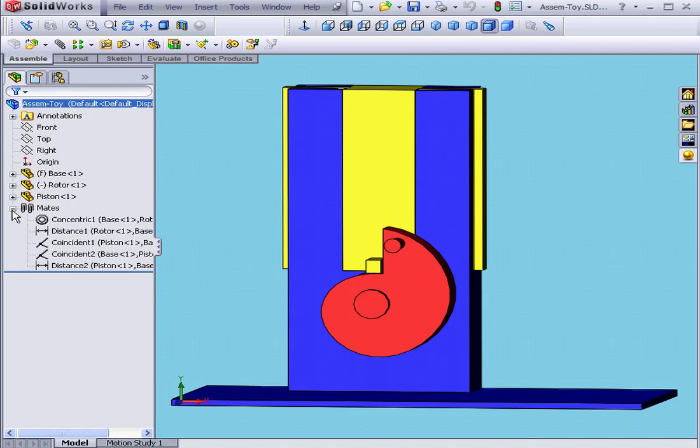Right here, as you currently see highlighted with these purple contours, are distance mates. They're currently set to 0 millimeters. Let's go to our Motion Study tab now.

First, let's be sure to disable Autokey. That's in case we need to move our model. We don't want the movement to be recorded. Now we'll position our time bar at the 1 second mark.

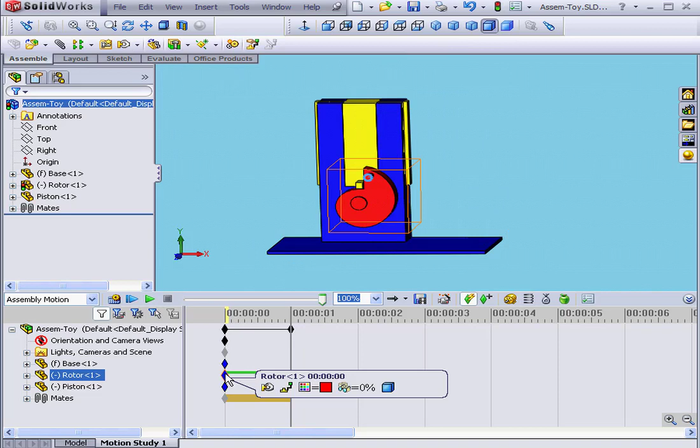Let's turn the rotor 90 degrees. A green change bar appears in our timeline. Callouts appear, naming the rotor at 0 seconds and again at 1 second. Let's move the time bar to the 2 second mark now.

I'm going to turn the rotor another 90 degrees to the approximately 180 degree position. Now we'll move the time bar to 3 seconds, turn the rotor again to roughly 270 degrees. The last movement of the rotor takes us back to the original position.

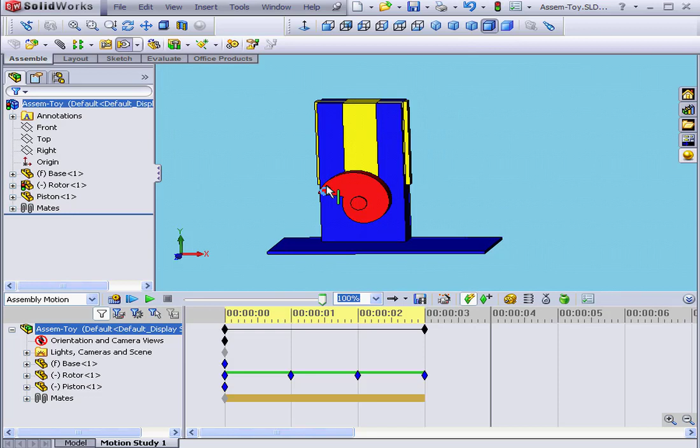This step is 15 millimeters. This means that the piston needs to go up 15 millimeters. Next, I'll expand the mates branch. Let's take a look at the mate named Distance 2. On the model, this mate appears in purple.

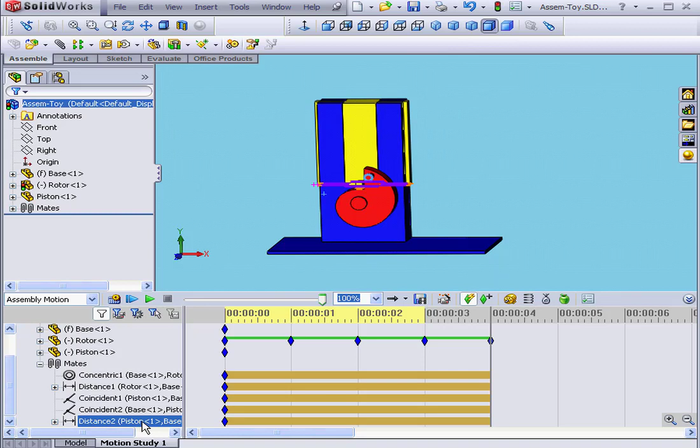Let's double-click on it. We'll enter a value of 15 millimeters. Tab and click OK. Here is our change bar for Distance 2. If I mouse over for callouts, I see the value of 0 millimeters at 0 seconds and 15 millimeters at

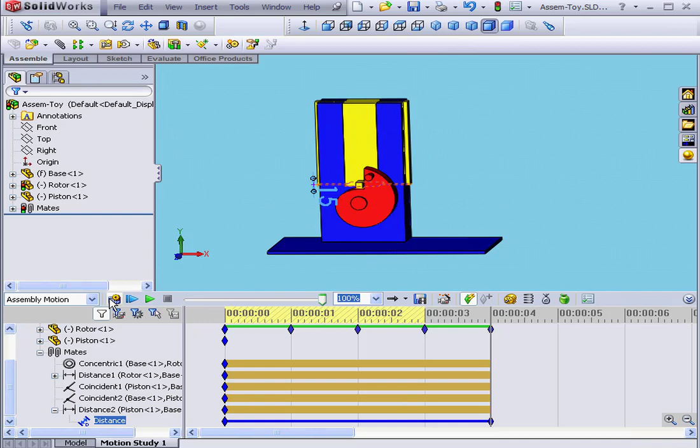4 seconds. The last thing I need to do is click Calculate Motion Study. We see a preview of our animation. Now let's put our animation in loop playback mode and play it from the beginning.

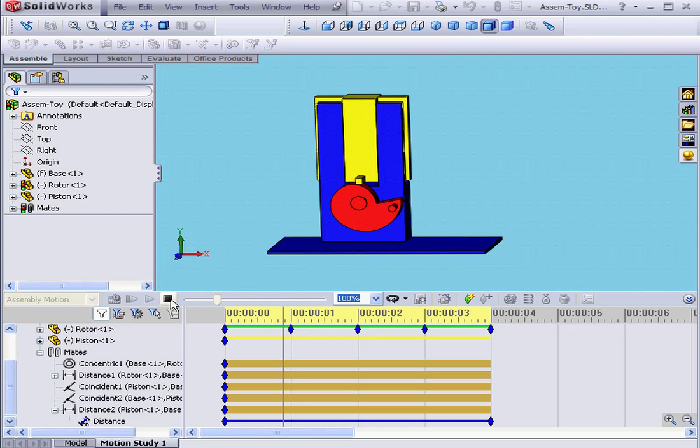As you see, the piston goes up, then collapses. And let's stop it. And this concludes our tutorial on using distance mates.